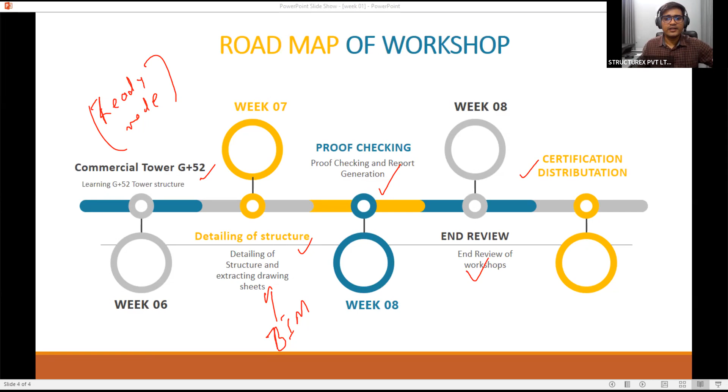Yes sir, yes sir, okay fine.

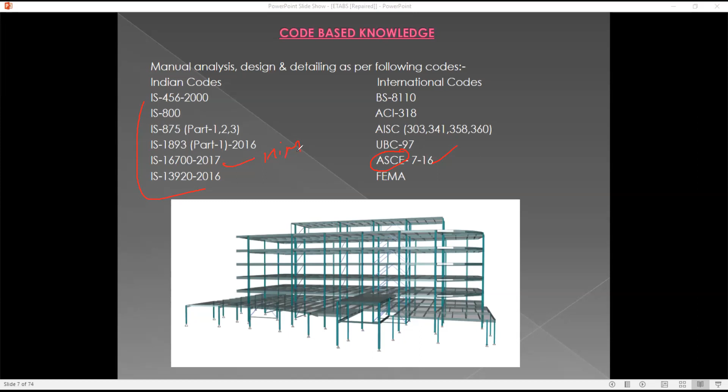If you don't have the code, you can search on the internet or find it in the drive. This is for the high-rise and tall structures that we do in India as per the IS codal provisions. Now, after that, the superstructure - all of you know how you can prepare the center line and how you can make the grids in the ETABS software, which are very easy things.

Now you are going to do that for the complex model. We have learned the things for the basic type of model with a similar story structure, but if you practice for a different type of story structure, it will become good. So after this, the list of analysis for the superstructure - I hope all of you understand. Is anyone having any question from that list of analysis and checks?

No? Okay, fine. Now let's see the things for the substructure. Here, the software you are going to use is CSI SAFE.

Many people are doing the things with Excel sheets also for the foundation and slab. Or you can say that the things you are not designing in ETABS, you have to adopt CSI SAFE. Also, you can use the Excel sheet - we have the Excel sheet. The problem with the Excel sheet is it's very calculative. That's why I will recommend you to use the software.

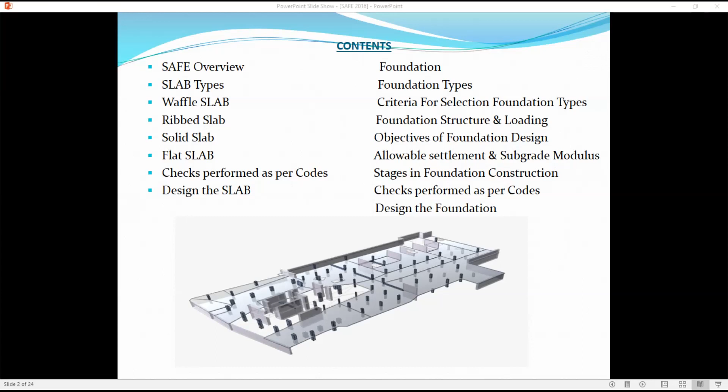Okay, so here if you see that you are seeing the presentation. This type of slab like waffle slab, rib slab, flat slab, solid slab, and checks - what kind of checks we have. This will become our integral part. Tomorrow we will apply all these things from superstructure to substructure. In a single structure we will apply, extract all the sheets and complete report on the project.

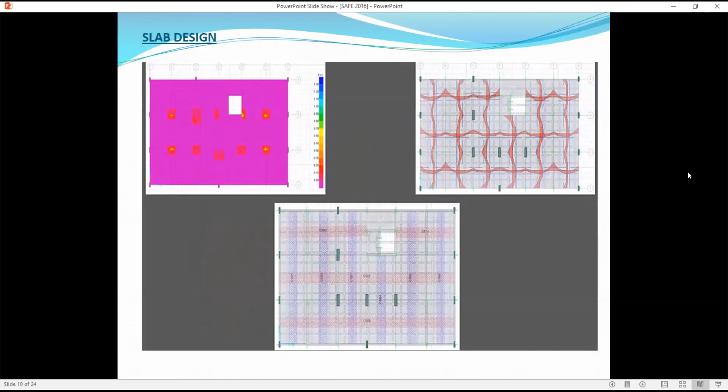Now if you see that after this footing, we have some more advanced topics, like the vibration analysis. Why do we do the vibration analysis? Basically the purpose is that every structure has a tendency to vibrate, in their self weight or when exposed to lateral load also it will vibrate. So vibration analysis is very important, and controlling the vibration is also important. So how can you control the vibration? We have some specific topics for that.

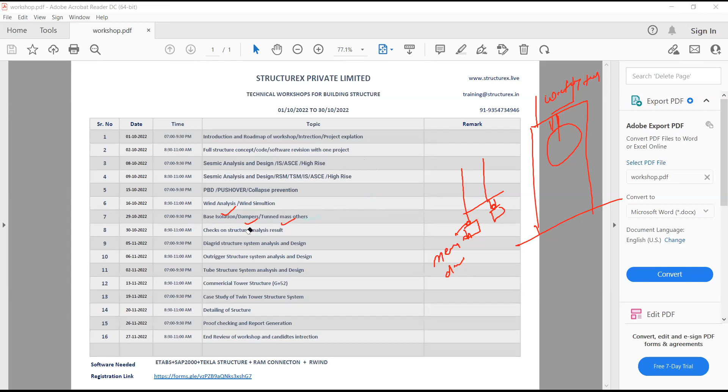So let's see, I will open some of the presentation related to the most interesting topic, because everything you know very well. We will just discuss major things. So let's see what is this.

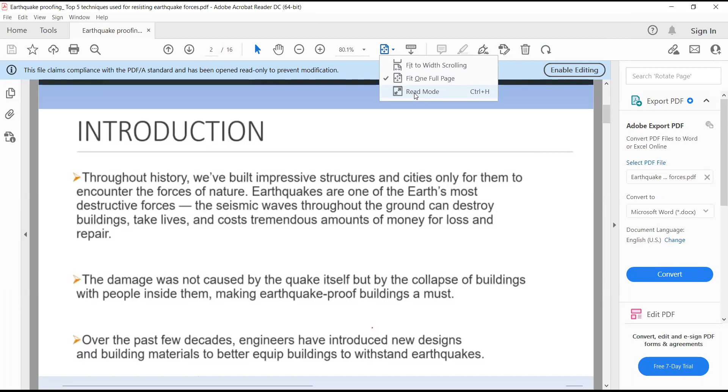So why are we very focused on the earthquake? Because the earthquake analysis is a little bit typical - typical in the sense that if you are going to design the structure, most of the things are surrounded by this earthquake consideration. One thing to always keep in mind: we can design earthquake-resistant structures that can resist the forces, but not 100% earthquake-proof structures. You can't design a 100% earthquake-proof structure, but if you change the framing and do research over that, it may be possible in the coming years. If we have new technology to do that, we can do it. But right now, we can just make the structure earthquake resistant.

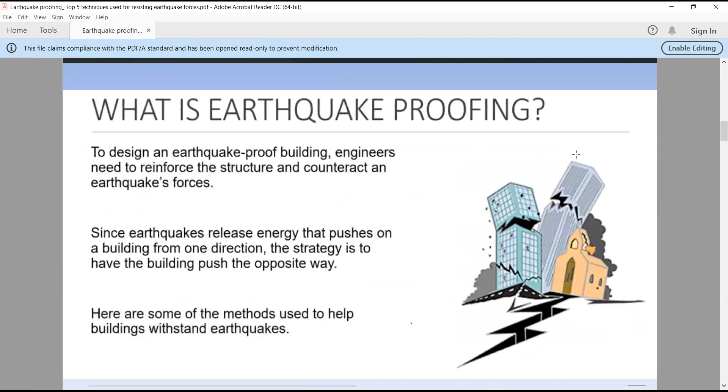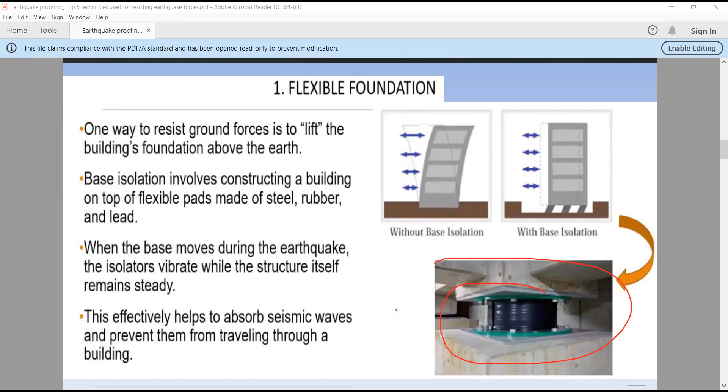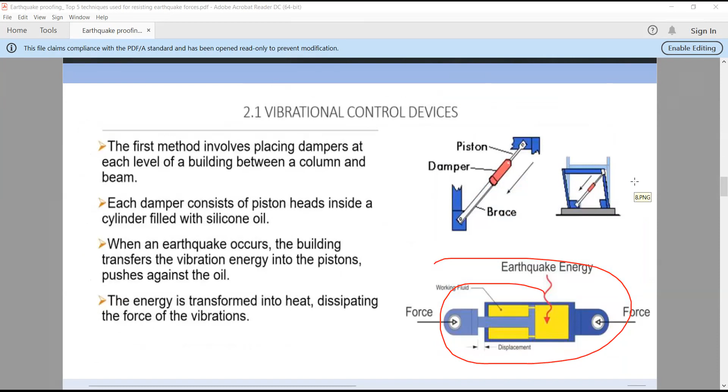After that, we have not this one. Yeah, this we have the dampers. This is also the mechanical damper. Okay, you are seeing the piston, you are seeing the braces. Okay, so how you can design this one? This is some of the extra part.

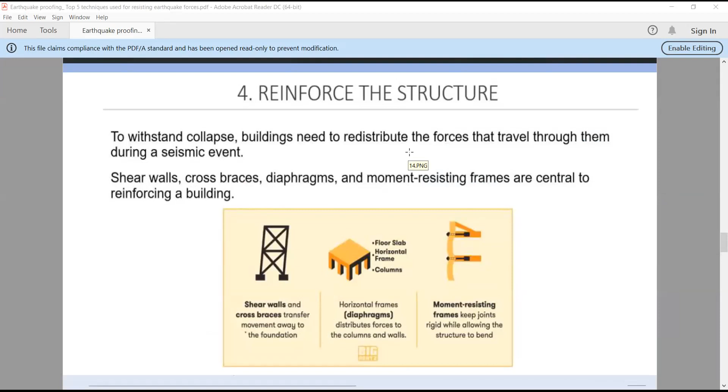And this one we have shielded building from vibration, that are the next we have the reinforced structure. Okay, like here you can read, to withstand the collapse, building need to redistribute the forces. Okay, so this is the way that you can. We have the shear wall. Okay, the diaphragm. Okay, these are the types of equipment and the method that you can implement here. Got it?

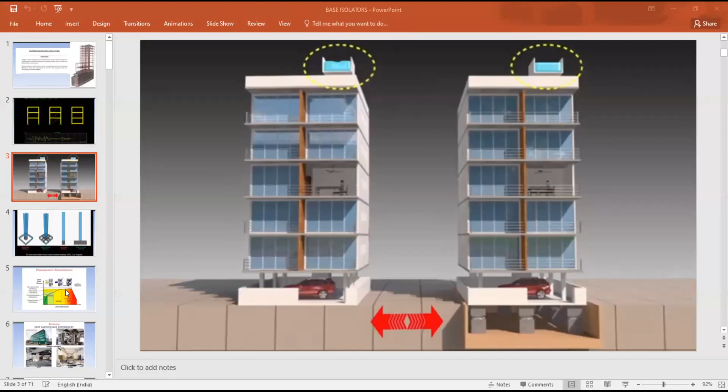If I talk about the base isolated, okay, so let's see about the base isolated. So you can see this is our base isolated. Okay, here you can see, got it, and how it's going to save our structure from the earthquake that are there.

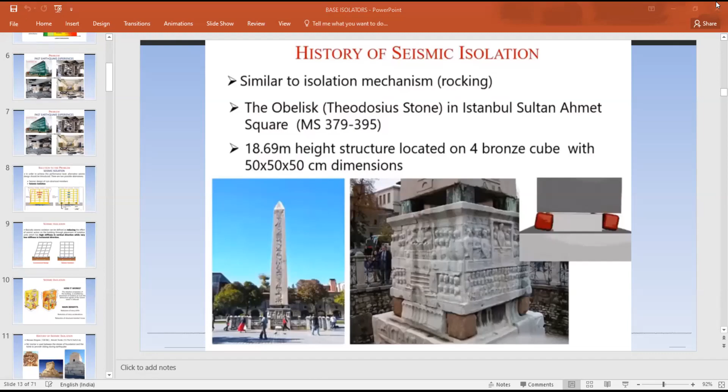Got it? So that's why we need to implement. Got it? Next, we will see this wind type of thing, the things from the wind. Okay, we have discussed about the earthquake. Okay, now we will discuss about the wind, and later we will discuss about our other framing type.

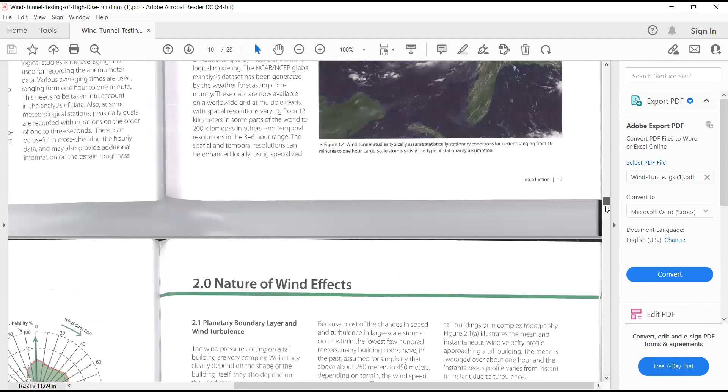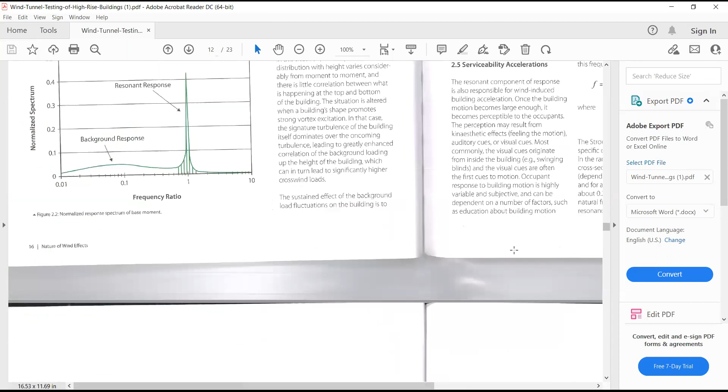Sir, actually, wind tunnel test, it is performed by a separate department. Okay, basically the FEA models we have prepared in our ETABS, so the department which is performing the wind tunnel. Okay, so whatever the wind speeds as per the code, it can consider, or as well as the options available which are dealt by the wind tunnel department, like the wind rose.

This one you are recently showing the picture. Okay, basically it can identify the wind speeds. After that, it applies the models, or some frequency range. Okay, or it just rotates 360 degrees on the behalf of the defined function load cases, movement based history. This one we are calculating the force point loads fx, fy, mz. We need to apply or interpret our results, sir.

Okay, so basically the wind engineering, this is a part of the wind engineering. So we need to first calculate the wind pressure and wind load. After that, we will implement into the structure and we will check the structure response.

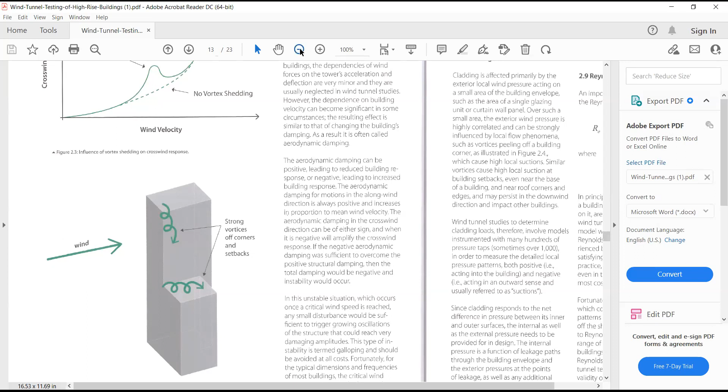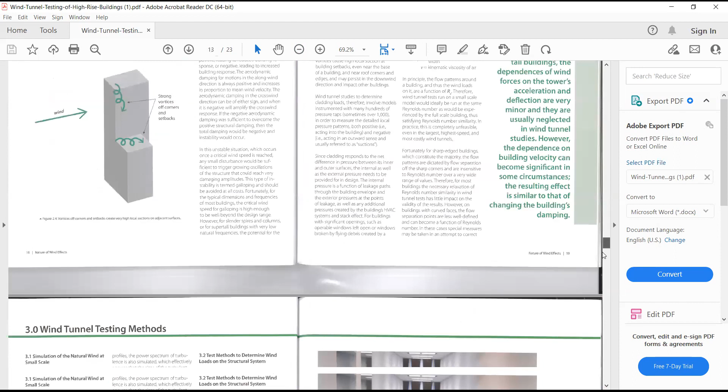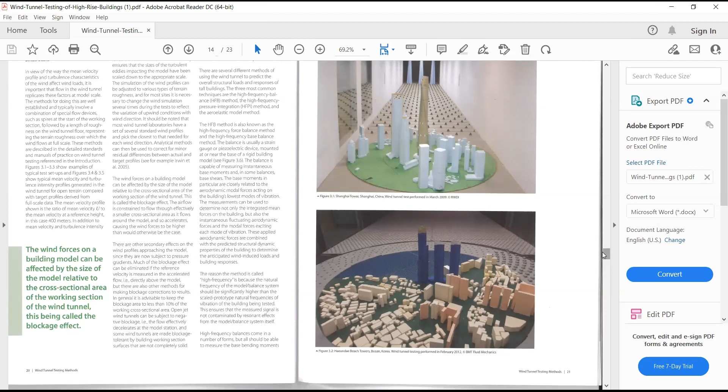So these are some of the guidelines that we have to follow for the wind tunnel test, and it's a very new thing. I will suggest all of you study this wind topic well, because from your career point of view, any consulting firm working at the international level has a different wind engineering department, and they demand specific wind knowledge. So we need to do that.

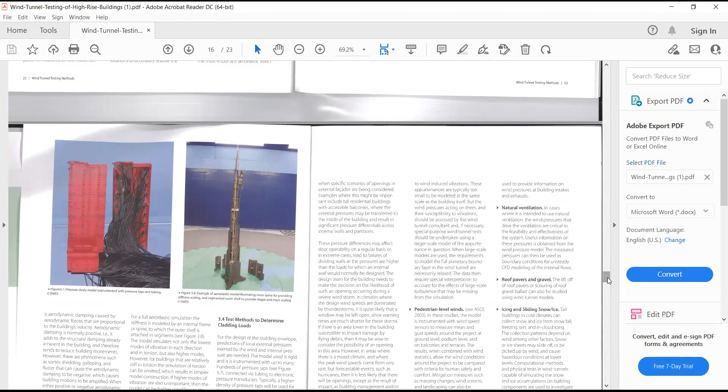And where will we do this? You can do it in ETABS also, right Karim? In ETABS you can also perform this wind tunnel test, but we are going to use other software packages also. Basically you need the FEA model, whether created in ETABS or somewhere else, but you need that. After that you can implement it and record their responses, how their story displacement behaves. There are lots of graphs given here.

I hope wind is clear to all of you, right? Now, after wind, if you see our learning plan, after that what we have here is that first thing we will focus on is the diagrid structure system. Not outrigger, sorry, I meant diagrid structure system.

It's very important to learn because it's very economical. If you compare the diagrid with conventional systems, we have a video on that, and we have also done research on that. So the diagrid structure is very important, but how you can design the diagrid, how you can obtain its parts - this becomes a composite type of structure, right Karim? Yes, the diagrid structure, you can refer to it as composite because there are steel members that we have to design, and their connections we have to design. So I will open one presentation to show you that.

So all of you are getting the things? Yes sir, hello, okay yes sir. And is it interesting, or what are you expecting? Interesting sir, interesting. Okay, just wait, I am opening one presentation to show you that.

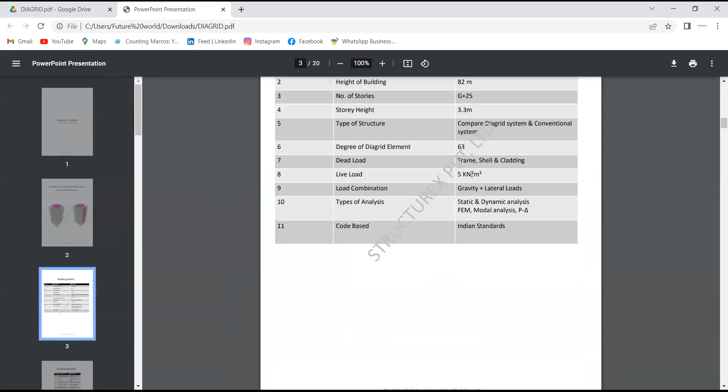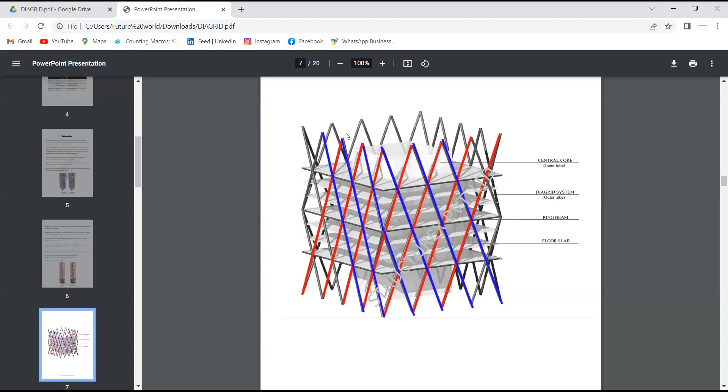Now why are we doing this diagrid structure, what are their benefits - that elaboration we will learn in deep, and also we will design their members, not only analysis results but their members also. So after learning this point...

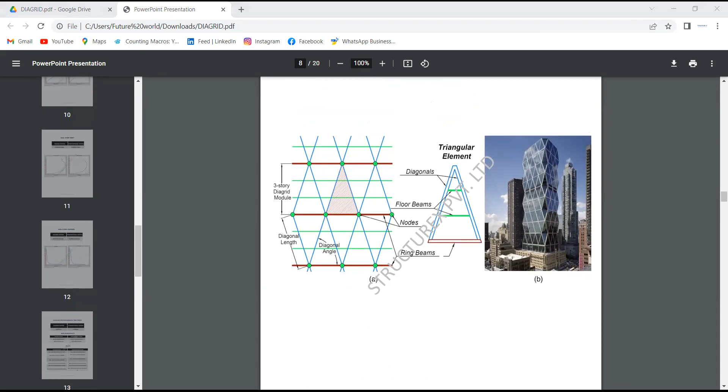...we will get into the outrigger structure system. You may not have an idea about that, but this is one of the very innovative approaches to control deflection in the structure. When we go for high-rise and tall structures, the general challenge is deflection in the structure, their story displacement. Got it? So to control that, we need some kind of special arrangement in the structure - that is called the outrigger structure system. I will open a picture and show you what that is.

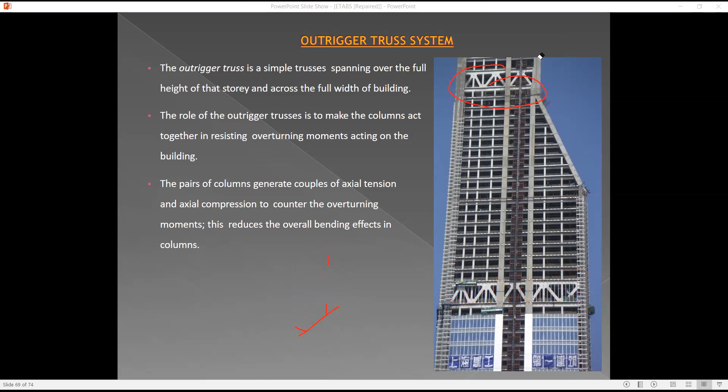After learning this outrigger system, we will enter into the first topic - I will discuss the tube structure system. The tube structure system, you know, is generally for super tall structures, like G plus 100 or 80. Then we have to use the tube structure system.

Karim, kindly open the example for the twin tower, that one you recently made. Hello, yes sir. Do you have this structure right now on your PC? That twin tower structure. Once more, I will check it, sir.

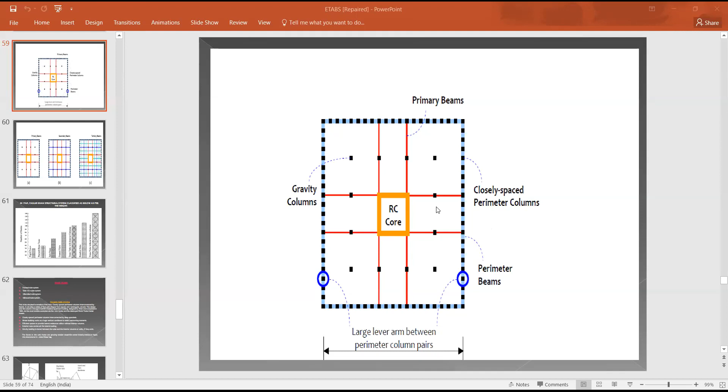After that, we have this tube structure. So what is this tube structure? Let's see. There is a type of tube structure like tube and tube, bundled tube. If you see, here we have the tube structure - we have the outer periphery column supports, and inside that we have one core, the RCC core.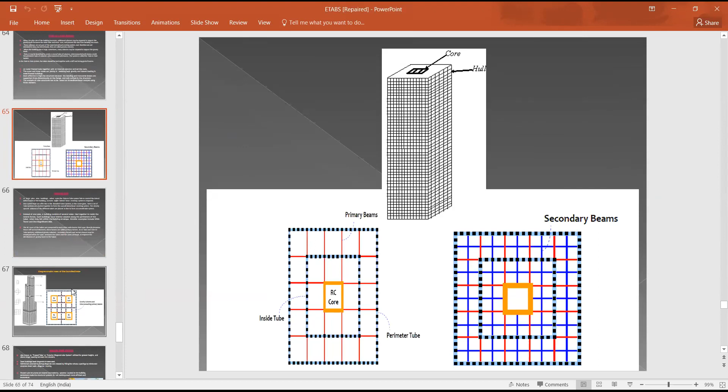Around that core, all the arrangement of the structure has been done. Got it? You can refer to this as a world iconic structure, because this structure is made with response to gravitational forces also, since their base is large. As you step up, the building dimensions go on decreasing, because this is very good for any type of structure that works against gravity. Like a dam is also made with this type of thing - first we have more area, then less area, and less area. Got it? So this is the tube structure system that we will learn in detail.

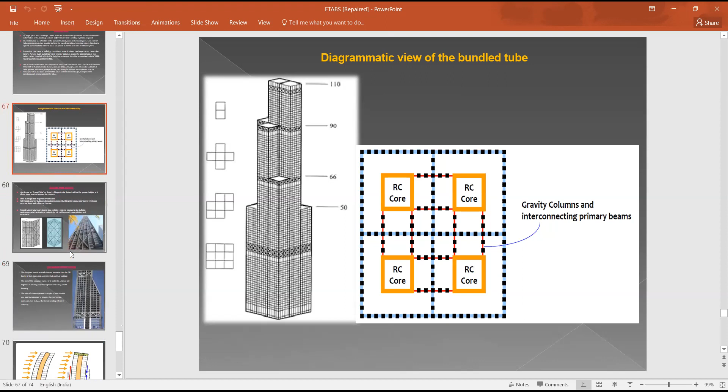We will give you ready-made things because it will take lots of time to make that one. After learning that, we have this bundled tube system - this is all part of it. I will give you one short example for this. So I think all of you have a clear idea about this workshop, right? Yes sir, both the RCC and the steel - people who are from steel and RCC, both will benefit from all of this.

Now after that, the next topic for today's session is the software. You can just write it down as a software problem - the software type of things, how you have to deal with the software.

Karim, did you find that twin tower? Sir, basically we have to search for it, we saved it sir. Okay, check it, just search that one. So first we will see.

We have seen these two software, ETAB and TEKLA Structure. Most of you know them - I will show you how you can collaborate between them. If you are using TEKLA Structure, all of you should have TEKLA and ETAB on your PC, either ETAB 18 or 19. All of you having ETAB 18 or 19? Yes sir, we have ETABS. We have TEKLA Structure? You need to install it - I have already sent the link in the group. You can install TEKLA Structure and collaborate between them. So just let me open the software.

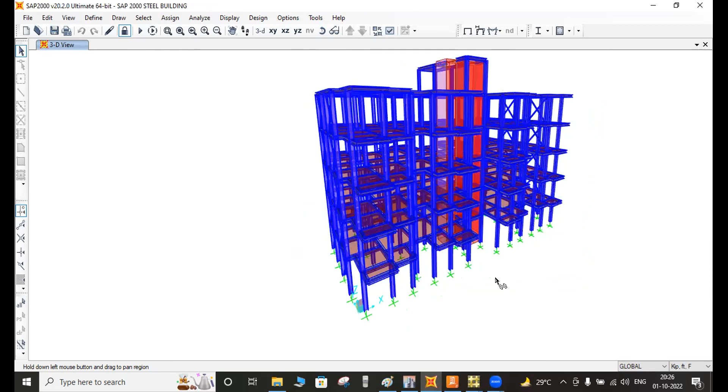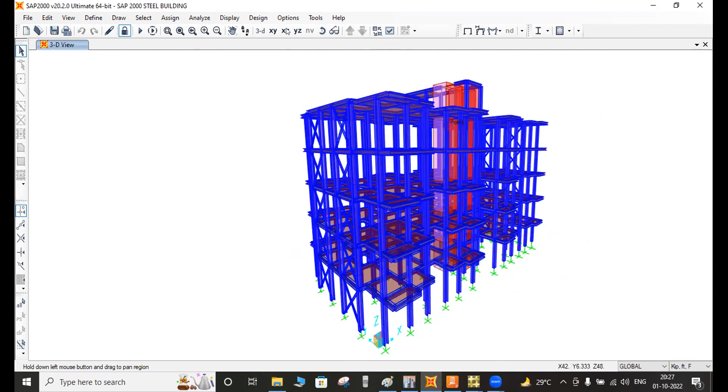These are wireframe models, which represent the members, not the RCC part. For RCC we provide reinforcement, but for steel structures we use members, selected as per code provisions, basically American standards. When performing the wireframing, which represents the members, after we analyze and design, our member becomes final. We also need to design the connections.

Connections, like when we take a separate joint or a particular joint... for example, if you are going to design an outrigger truss system, you need to do these things. You can do this in ETABS also, but if you use SAP it gives better results, because SAP is basically used for infrastructure projects and steel structures.

So you're seeing one perspective of the building from the side view. You can implement these things in the RCC structure too, and see how you take the forces for the connection design. Okay, please continue.

Once we complete the wireframing, our member becomes final. The steel part is divided into two parts: wireframing and connection. In wireframing, we control whatever loads and framing we have. But how we connect one joint to the second joint is called the connection, which depends upon the type of loading. For particular joints we have to consider the major shear and minor shear, values which we need to take from our model.

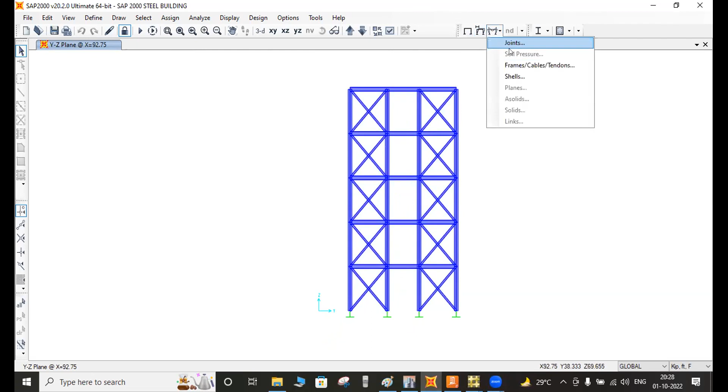When we move for this one, we identify the moments, and the moments can be considered and applied. So for whatever particular joint we consider, we need to work with the models, turning off the display and deformed shapes in the graphics.

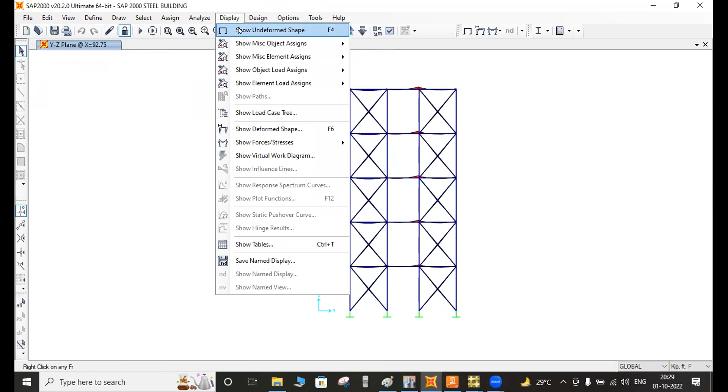When designing the connection, we need to prepare one joint. So we open RAM Connection and move for the joint. We consider which type of joint - different types are available, like BCF, BCW.

There are options available: first performing the framing connection or truss connection. Two options are available; I want to perform the framing connection. The joint types to consider are BCF, BCW, BG, BS, CS, which represent beam column flange, beam column web, beam girder, beam splice, and column splice. We need to perform the connection modeling, not the wireframing - not modeling the whole framing, just the connection joint modeling.

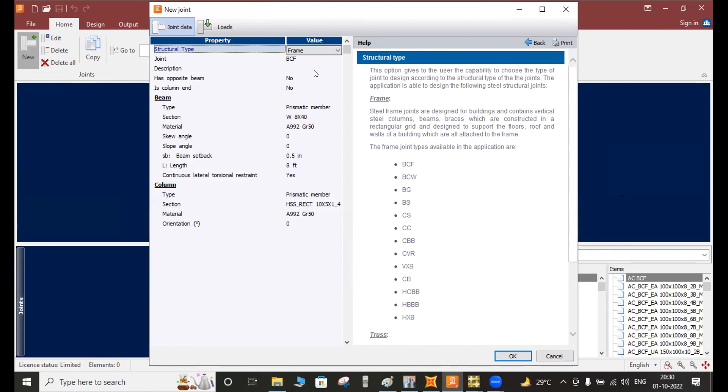So we select the particular joint. When selecting the particular joint, we also need to provide the templates. Which templates we need to consider depends on factors like V2, V3, M33 - all the parameters we need to consider depend on the templates also.

First of all, we need to provide the connection modeling. The joints, which is the BCF, you are required to define - opposite beam, yes or no, column end or no. Define the members. Your members will become the beam, prismatic, tapered, or haunched - which is the type, what is the profile.

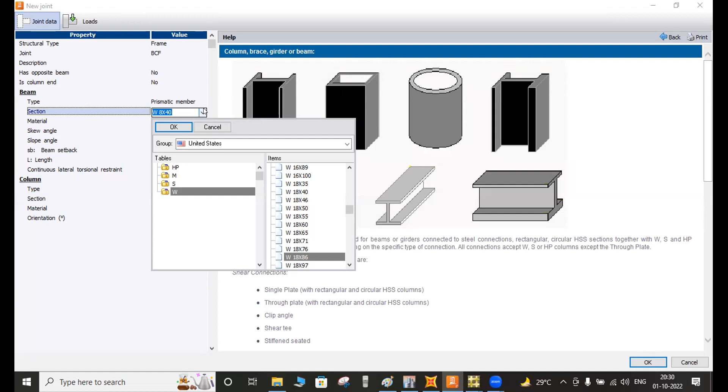Profiles indicate what course you need to take on behalf of defining the section size. So section size may be W shape or HSS, channels, angles. We need to be selecting these section sizes as per our wireframing order. Define the grade also, which grades we have to consider.

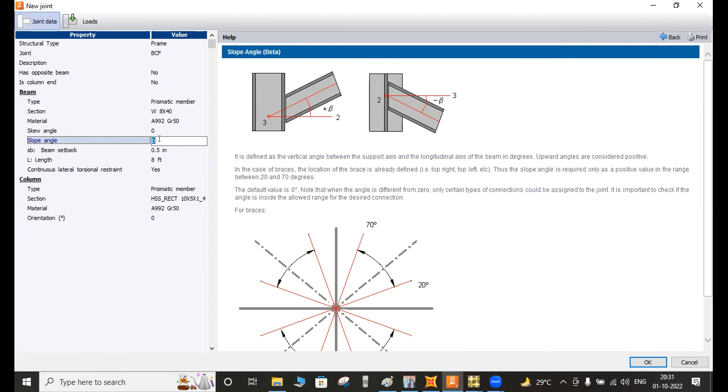Skew angle - sometimes in the plan, our beam will become skew, so we need to put up the skew angle also. Finally, we can see that we need to put up the connection modeling, or clearance. Generally consider half-inch clearance between two members, or what is the length of the member. If you want to consider lateral torsional restraint, you can also consider that.

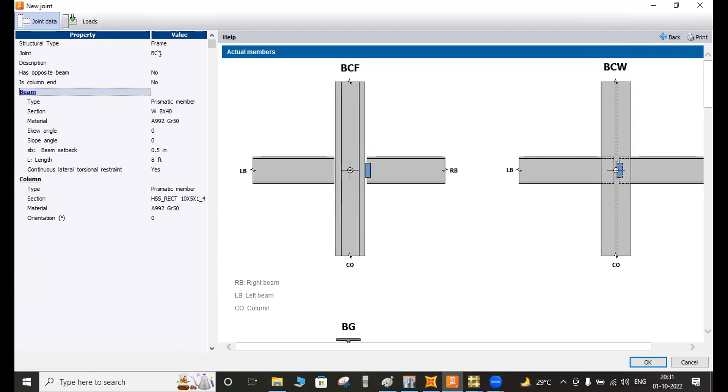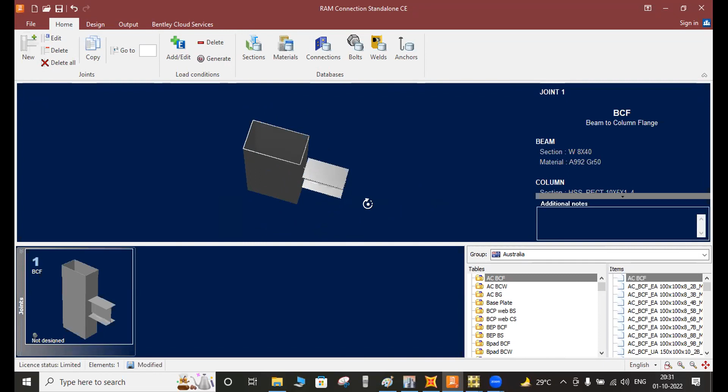These are the modeling parameters for the beam. Then define the column - basically the joint for the BCF, beam column flange. Similarly, members, prismatic, sections, W shapes, grade, orientation - when we consider this as per our model, when we select and perform this, you can see that based on the parameters, when we put this up, your joint will become generated. It means the joint for beam, column, flange, BCF along the flange.

So members, basically we are using the HSS. First of all, we have to create the joint using the HSS options. Moving forward, right click, the options available - load. We need to put up the load also, depending on the model, when we identify how much amount of V2, axial, M3 we need to consider.

So when we come to our model parts, moving for general options - standard, apply, and okay.

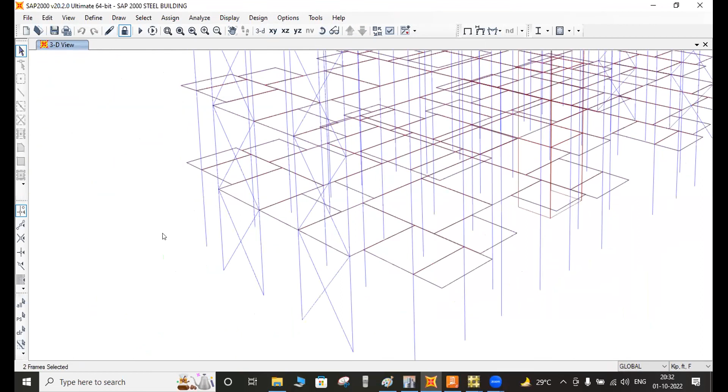For any particular joint, suppose we need to consider moving to the 3D - suppose I am selecting the joint for beam to beam or beam to column. Suppose we select this joint, right click, show selection only. These particular joints we are considering along the BCF. When we identify the particular forces on a particular connection, we need to identify them.

Hello. Yeah, Karim. Hello. Yes. Your voice is lagging. Okay sir, just wait.

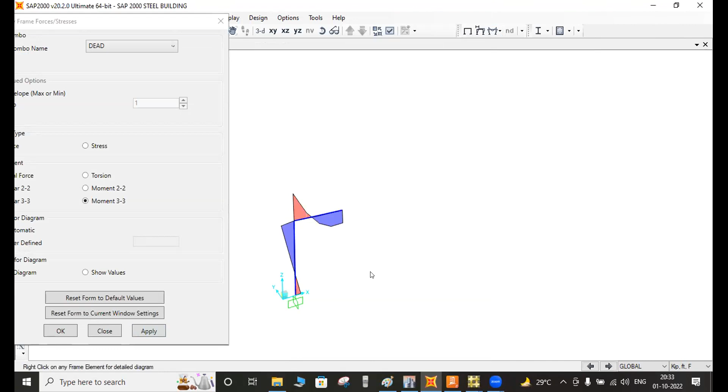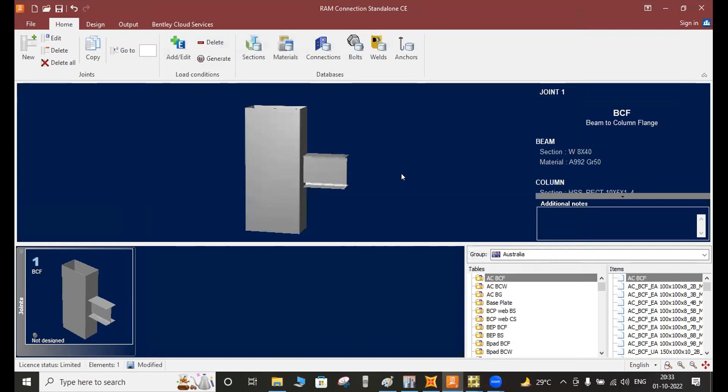Basically, you need to improve your knowledge in this type of software also, because as a structural engineer, you need to know steel and RCC very well. You have to adopt that for implementation of things in the RCC structure too. This is one of the different parts, as most people here are from RCC, so you may find difficulty, but don't worry, we will try to solve your problem.

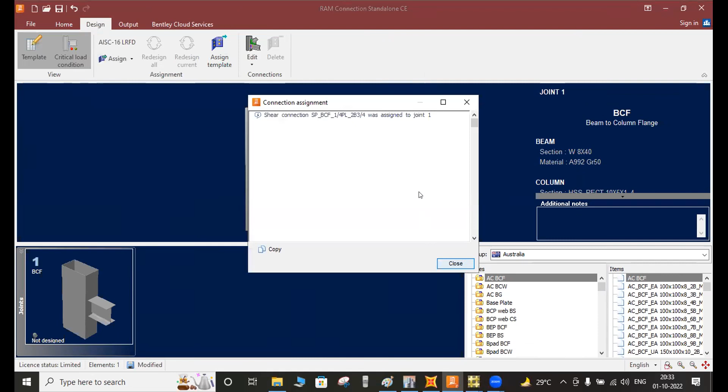After the collaboration between SAP and RAM connection, we will be able to design our truss structure, and we will be able to design our outrigger system - that all kind of thing, right?

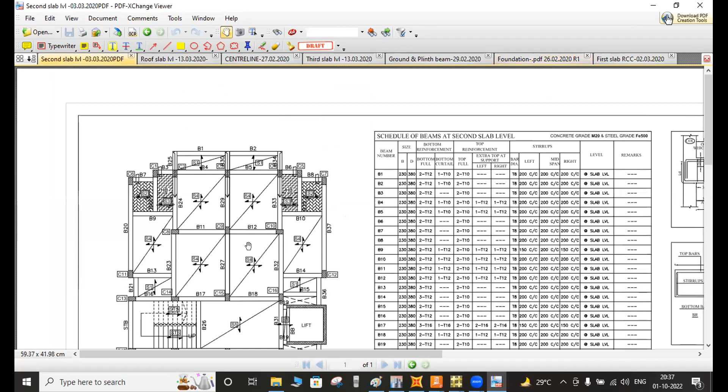So basically we are using the CSI detailers or CAD also, on behalf of that we extract the sheets also. These are the foundation plan, this one, or we can see it is the second floor, which represents the type of framing. It is the slab also represented here. On behalf of that, it can give the reinforcement schedule also, schedule typical sections also.

Basically we are showing this one. I have one model also. These are the models which are in ETABS. This is a G+4 model, sir.

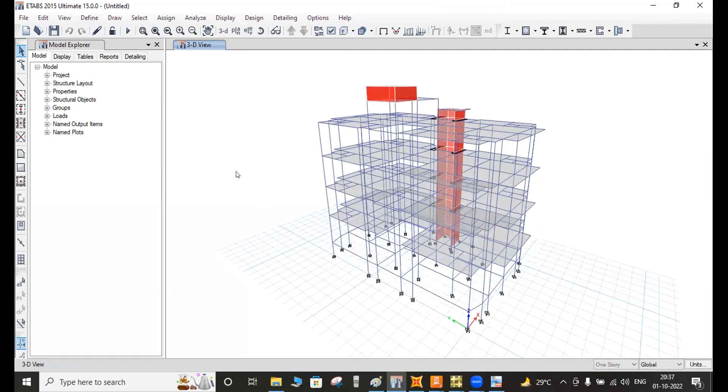So when we export into the CSI detailer or using CAD also, to perform the sheets, this one. So these are the sheets for the second floor, or first floor also, or beams also. These all the sheets we extract.

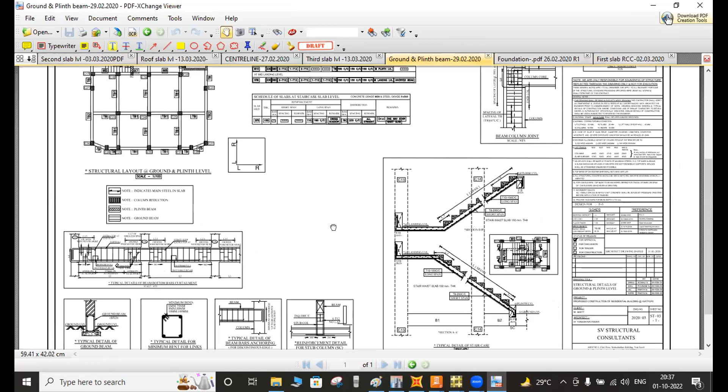On behalf of that, we are performing the fabrication as well as the execution work. So third floor is also available, this one, or the roof slab also available, sir.

So finally we got the sheets, this one. Sheets available to perform the fabrication or execution work with the help of the detailer or software we are using, but using CAD also to perform some drafting work also, sir.

So all of you get the point of how you can utilize that software.

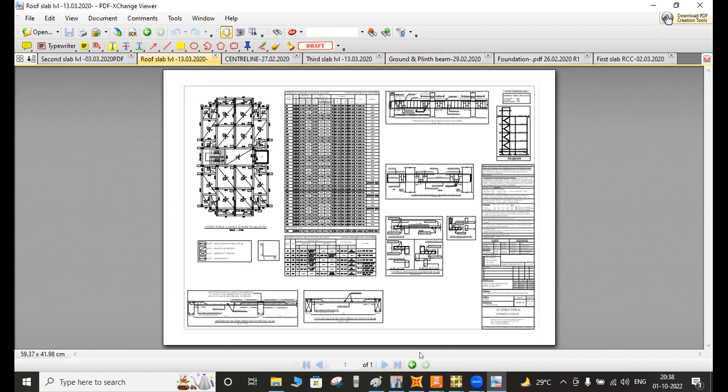But see, Karim, this is the adjacent sheet that you created from the CSI detailer. Yes sir, we are creating it in the CSI detailers. We use the CSI detailers, export in the EDB, and we have got the remarkage also, or the major things also. But we are using the EDB file to export, sir, which takes some time taken, sir. Finally, these are the final sheets, sir.

Got it. So now, you can see there is one software that you know - we have that called TEKLA Structure. People know very well here in this group. So TEKLA Structure is also something you can utilize for detailing the structure. You can extract all the sheets and all the facilities that are available here.

I will personally recommend you to use this software. If you use this software, after designing and analysis, most of the problems you may find for final presentation of the project can be solved with this software. You can arrange all the drawing sheets, you can make the 3D model again for the presentation, because the ETABS file while presenting and modeling is not very preferred - that is just a line diagram. If you see ETABS, you can just see the line diagram. There is no such kind of major physical model you can find there.

So here we have one software called TEKLA Structure. You might have seen this one on the internet, or you may have learned from us also. So here, just take an example - I have all the drawing and modeling sheets that we have. Now if I want to make some kind of detailing sheets here, like I am making one short model.

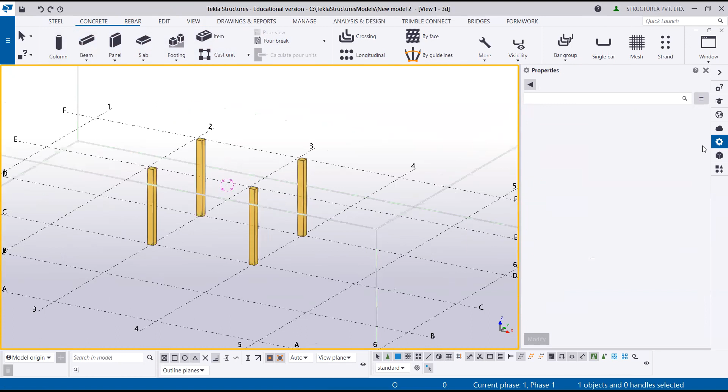So next, what we need to reinforce this one. In TEKLA Structure, if you see, the reinforcement - you can do the reinforcement very quickly. Got it? Like here we have the column reinforcement.

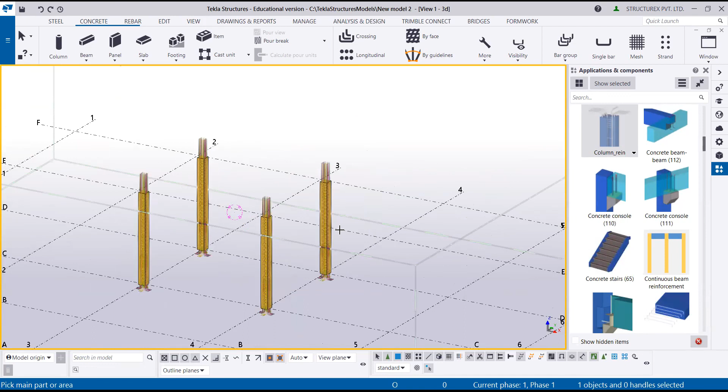But see, this seems to be very easy, but sometimes you need to modify that one also. Like we know how much reinforcement we need, what will be their layout. If you know that, you can simply arrange all the things - like if you see the column layout, their lapping strips, you can arrange all of that.

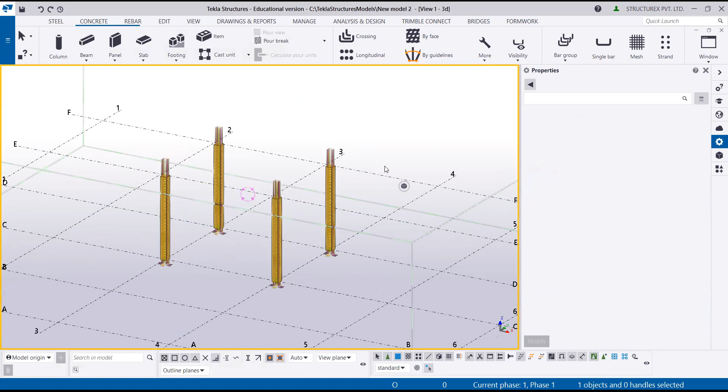After making this one, just take an example - we need to extract the schedules from here. This is an example of a column. If I need to extract the schedule, it's very easy, and you can extract how much material and their cost, unit weight, all kinds of things.

So now let's see, I'm just selecting this one, and all this we will do in our session. We will do that one.

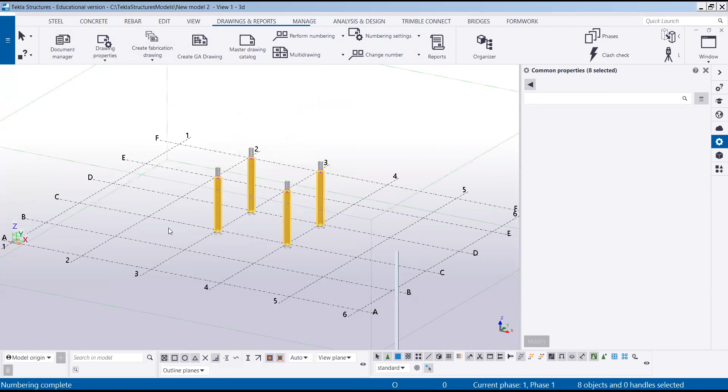So you can see, just wait, this is not that one. Yeah, Mr. Ombi, please switch off your camera. Okay, just give me one minute, I am trying to show you with another. I think there might be some issue in the software. Just wait, I am extracting the single one.

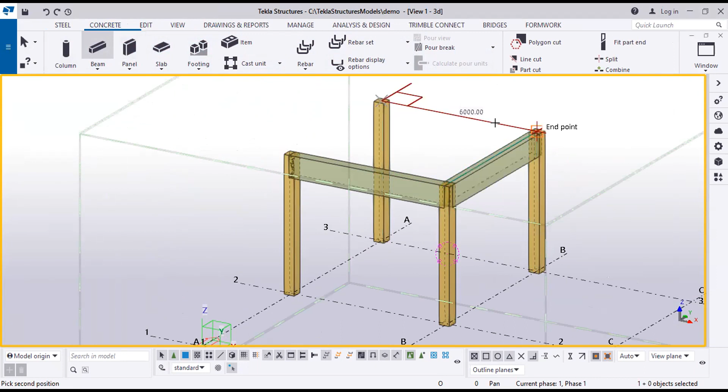Generally we have column, beam, shear wall, this type of arrangement, and I'm putting some beam here. Just avoid some of the errors because we don't have time right now. I'm just making one reference one.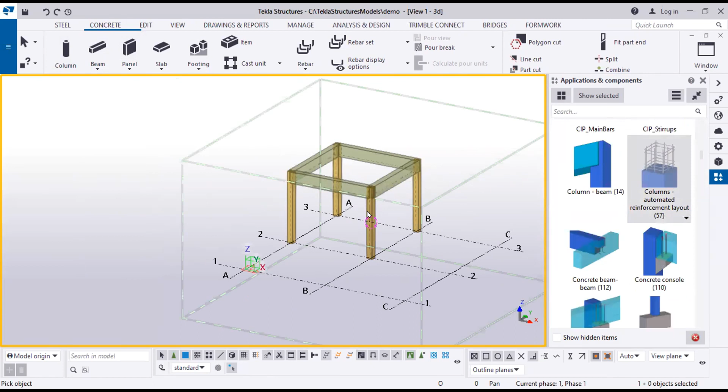So after making this one, just take an example, this is one unit we have. We need to reinforce the thing. So if you see the concrete detailing here, we have the column reinforcement layouts. You can implement that reinforcement directly from there, but ultimately you can change their units also, like if you need more bars, more type of rebar details, longitudinal bar, primary type, everything you can do here. Got it?

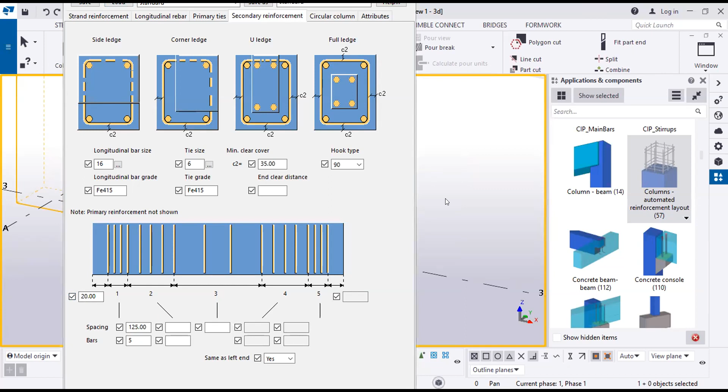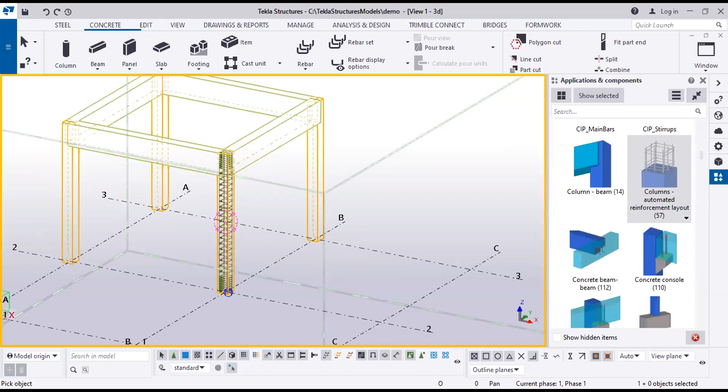So here you can see that we have this automated reinforcement for one section. We can just implement that one for all the sections also here, like if I want to put the reinforcement layout here, here, and here. And what about the beam? So the beam section also you can reinforce. You have to choose that beam layout, but you can change their stirrups also, stirrups of their dimensions, each and everything you can change.

Like here, I have reinforced all the sections. Now let's see that if we need to abstract the detailing sheets from this drawing units, we just need some of the tools to apply that one. Okay, drawings and sheets.

After that, we need to create the drawings. Here you can see that we have different types of drawings. I'm creating one cast unit drawing, and you can see the drawing has been created. If I check the document manager here, you can easily find that drawing sheets. Okay, it's opening.

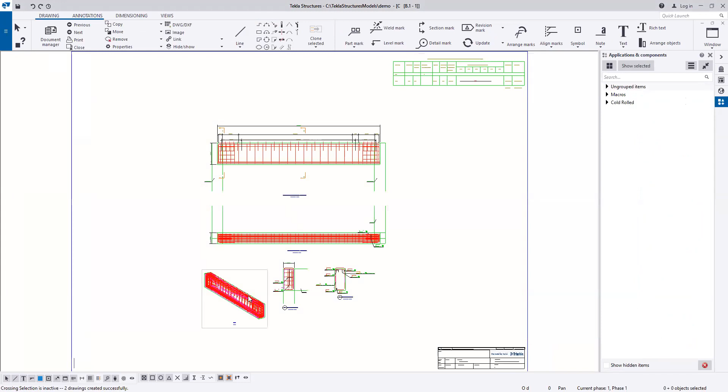Here you can see it will give you the automated reinforcement for this beam. You are seeing that one. So this is the power of this software.

Also, not only the drawing sheets, you can extract another part that is called the cast unit weight. There you can do estimation very easily. Like if I want to do the estimation, okay.

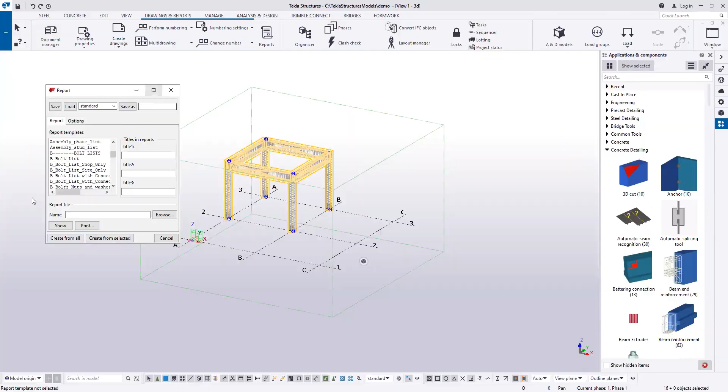Here we have create from selected. Now let's see that if I want to make one cast unit bill of material, like how much quantity you are using, okay. So you can see that you will directly get this one, like unit B1. What type of reinforcement you are using, their grade of concrete, okay, that all kind of thing.

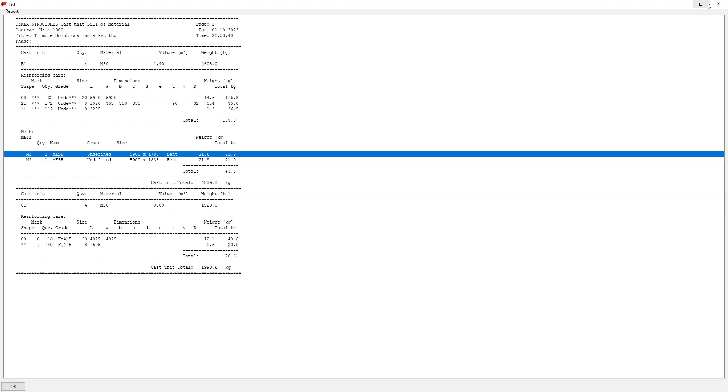You are seeing undefined because we don't have defined the bar bending schedule for that one. So this is the kind of things you can do with TEKLA Structures. Cast unit list also you can create. After that you can also get the material summary list. Here you can see the material report - you can abstract, correct, each and everything you can do.

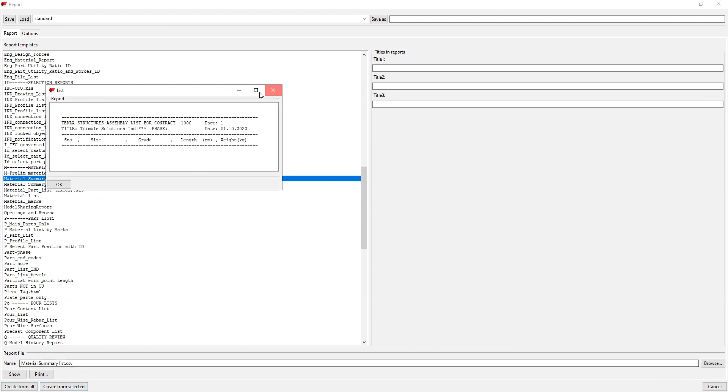But see, the thing is you need to learn the software. It will not take so much time - 10 hours of this software is enough.

Also, you can do the clash detection. There are lots of things you can perform here. There we have the A & D model. If you are using TEKLA Structures, you need to install some plugins. So here you will be able to see the ETABS - you will be able to see very easily the ETABS things. After that, you can directly export that from ETABS here.

Now, Kareem has just told you how you can extract the sheet from ETABS to CSI Detailer. But here you can make the physical model and you can again extract the things. You can extract all the required things that are in the building structure - either it's staircase, footing, beam, column, shear wall, core wall, anything.

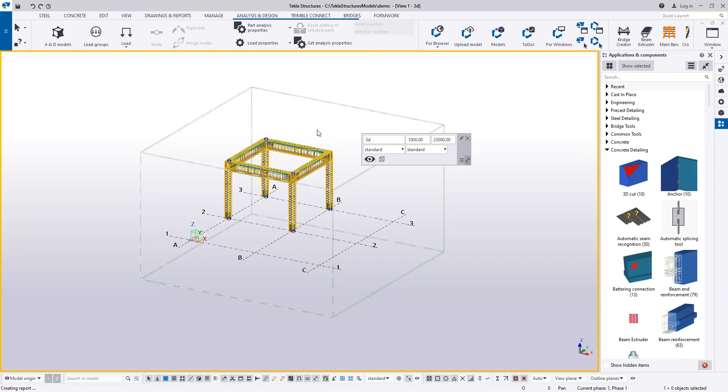Either it's a tuned mass type of thing. Like if you just assume that we have steel ball or steel type of things in the structure, okay, then how you can extract that one? So very easily you can do it.

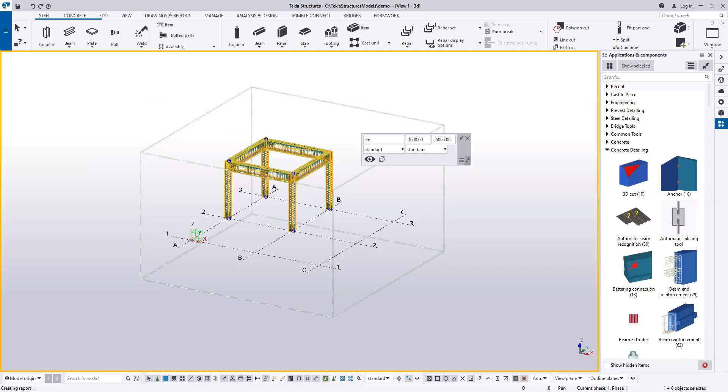Got it? So this is one of the very powerful tools that nowadays is very popular in the structure field. Okay, so I hope this session is very informative for all of you, right?

So if anyone has any question from today's session, they can ask. All of you get my point, get our point, that how you have to operate this workshop.

Yes, sir. Only by seeing the real things using the software can we understand. Yes, see, software, different type of software.

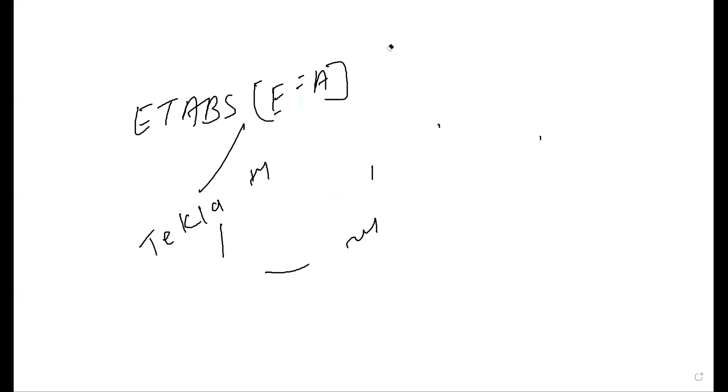Here you are seeing tomorrow's topic, this one. Okay, for the software, we will do all the things in ETABS from basic to very advanced, and we will also show you how you can put the data - superstructure, substructure, then analysis, and all results with their DBR, that is called design basis report, and ETABS report generation. This will all be our tomorrow's topic.